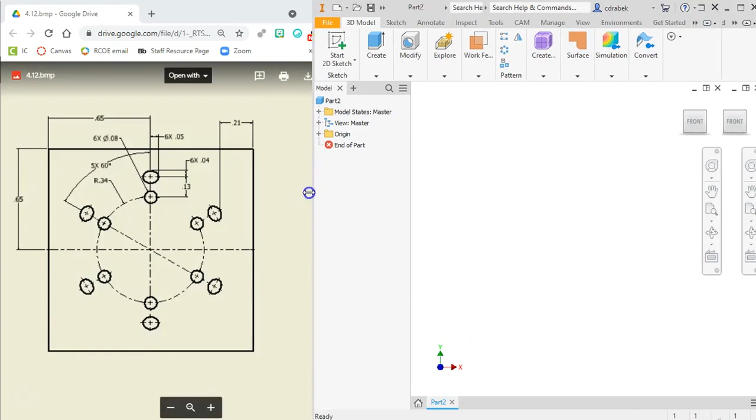So let's go ahead and get started. Let's go ahead and start a sketch. Our basic shape is a rectangle, so I'm going to draw a rectangle, and I'm going to have it centered on my part.

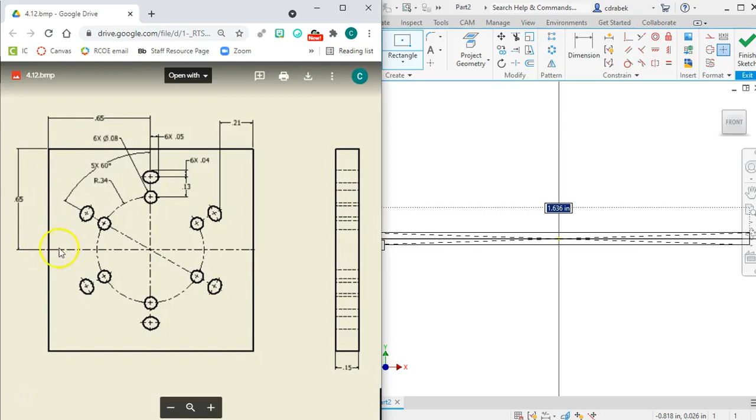So here we can see that there aren't any overall shapes, like dimensions. We don't know that, but these 0.65 dimensions are dimensioned from the end to a center line. So that's telling me that half of it is 0.65, the other half is 0.65.

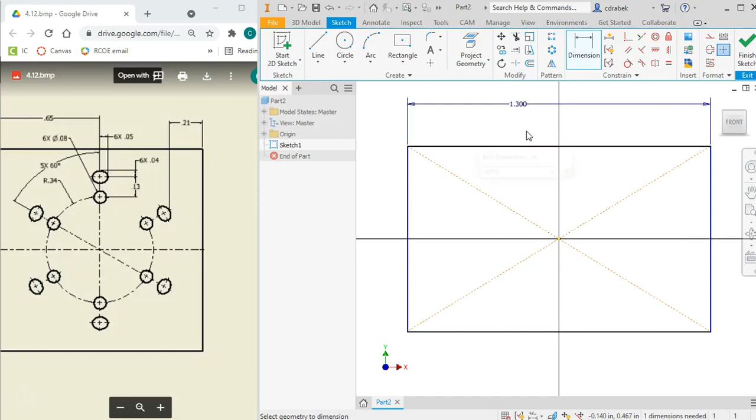So with that being said, if you don't want to do the math, you can put this as 0.65 times 2, and this one is 0.65 times 2. And now we have the same shape.

Because these holes are cut all the way through the part, we don't need to extrude this and then start a sketch and put them in. Let's do it all in one sketch. So let's go ahead and look here.

So we know we have a circle, and the circle, you can see this center line here. It's a circle that is a center point, basically, with a radius of 0.34. It's calling it a radius because you see how the circle's broken here? So we can't call it a diameter. So I'm going to start with that.

So I'm going to draw a circle and I'm going to use my construction. And then this is asking for a diameter, so I need to do 0.34 times 2 because I have to double it. There we go, let's get rid of that construction line, or the construction button selected.

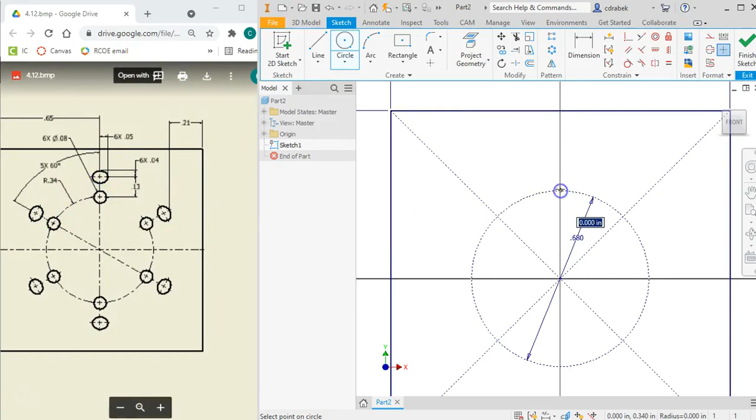And then I'm going to draw a circle. Let's just come in and do one more circle. I know that it is vertically on center, so I'm going to let it be, and I know that the construction circle is on the center of my little circle, so I'm going to let it place those. The diameter is 0.08, that's what the drawing says. And it is black in my case, so it's fully defined.

So next we're going to do the ellipse. The drop down circle says ellipse, and I'm going to select the center here, bring it out, kind of oversize it a little bit so we can add our dimensions. So from the center of the ellipse to the top edge is 0.04. Let's go ahead and dimension that.

Let's see here. Click on dimension and then just select the ellipse, and you can move it 2 different directions. We're going to have to add both of them. So let's start with this one. This should be 0.04. Let's select it again and move up, and you can see here it's 0.05.

And I want to make sure that it is actually vertical here, so I'm going to try to drag it and we see it's not. I'm going to double check this guy. Oops, see that one's not either. So let's add a vertical constraint, center point to the center origin here, moved it over. I want this to be on center also, vertically centered.

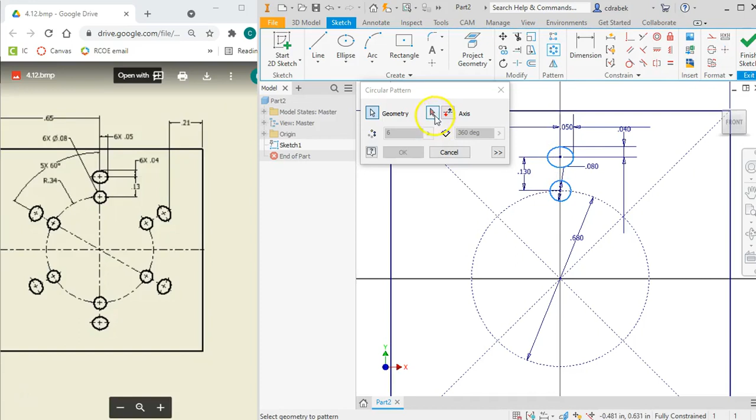And it's asking for an axis. So the axis is what's the center point you're going to revolve around? Well, these revolve around the origin in this case, the center of this construction circle, everything revolves around that point. So that's what I want to select.

And there are 6 of them. 1, 2, 3, 4, 5, 6. On the drawing, we do not put 6 because from here to here is 1, here to here is 2, 3, 4, 5. So on the drawing it says 5, but in reality we have 6 of these groupings. So we need to make sure we have 6 here. And then they are equally spaced around a full circle, so it's 360 degrees. Let's hit OK.

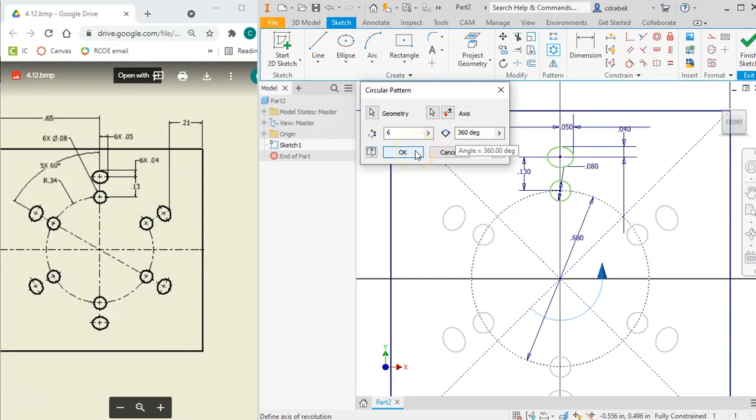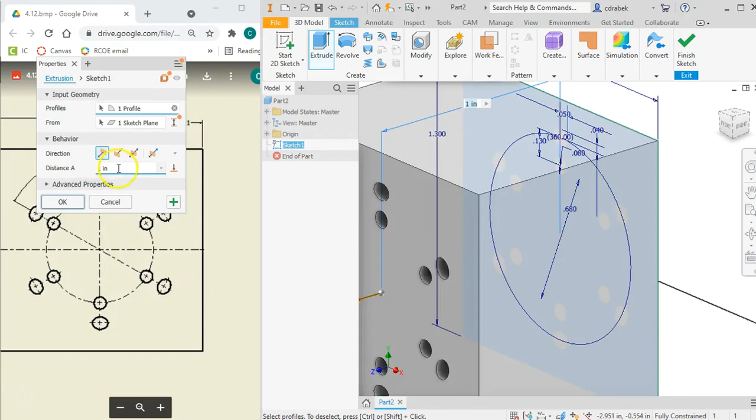There we go, so all that's left is to do our extrude. Let's move this over and let's see what our extrude is, 0.15. So come up to 3D model, click on extrude, select this face here so that it puts them all in, and it's 0.15. And there you go, there is your finished part.